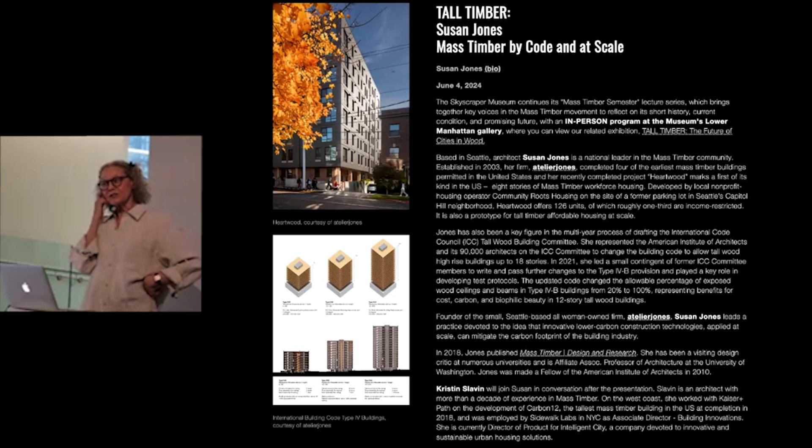So thanks for coming tonight, and thanks to the people online who will see this in the future. Tonight's event is the lecture by Susan Jones here in the front on tall timber, with a new title that she will post for you. But at the substance of this particular version of the larger series that we call the Mass Timber Semester, we're exploring a whole range of ideas that are embedded in the exhibition around you, here in the gallery: Tall Timber, The Future of Cities in Wood.

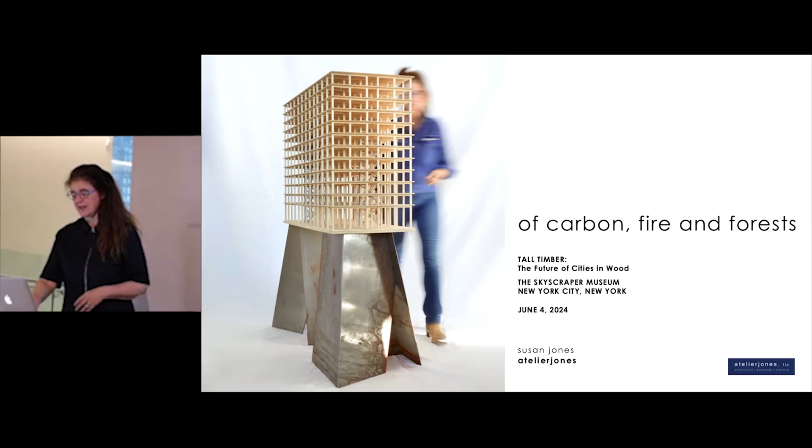This lecture is called Of Carbon, Fire and Forests. And I did change the name. I will cover all of the themes, but when I began to draw out the things that were perhaps less well known about mass timber, I kept coming back to these in my heart. So you're going to hear a little bit about that.

Just a quick thing on atelierjones. We are based in downtown Seattle, an all female-owned, female-led firm. We currently have offices in the Bullitt Foundation up on Capitol Hill, which is also known as one of the more sustainable buildings on the planet. At least back in 2013, it was the most sustainable building, and we've all globally learned from this building. I'm very honored to be associated with it today.

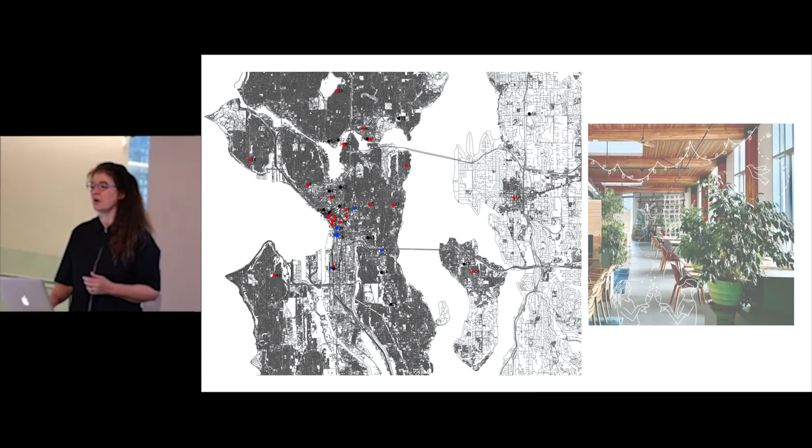But I also grew up in the Pacific Northwest, some third or fourth generation, depending on how you work it. This is a portion of my office at a retreat a couple of years ago, in a forest that I do own as part of my family. It's a little retreat center that I built there. And the forests are really important parts of our DNA and how we experience the world and think about them every day.

But a little bit about atelierjones, just very quickly. We have been known, as Carol mentioned, as national leaders in the mass timber space for over a decade, not quite 20 years, because I didn't even know about mass timber until I learned about it from my European friends, where I had worked for many years after finishing my degree at Harvard. The design work that we did in the first 3 or 4 years, which I'll touch on very briefly, established a relationship with the AIA nationally to go into the codes process, which I will talk about in more detail.

And that really became the training ground. In the beginning, it was astonishing to think that our little firm could have 4 buildings out of mass timber completed, and these were 4 more than any other architect in the United States in 2017. So that quickly has changed now, and I'm very proud of that. I'm very proud of the community having grown.

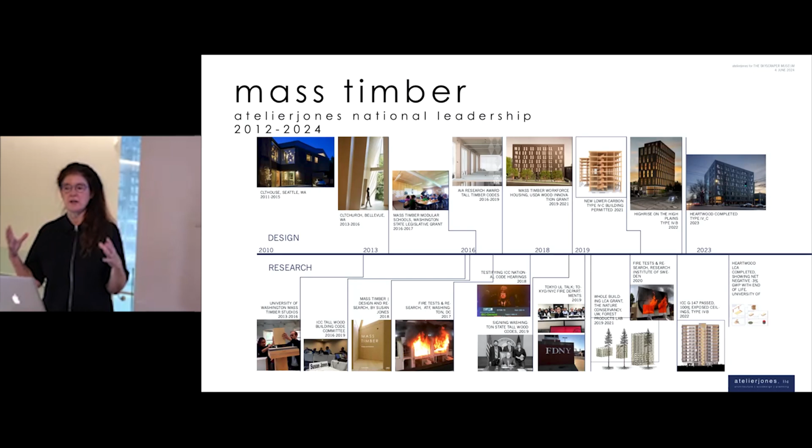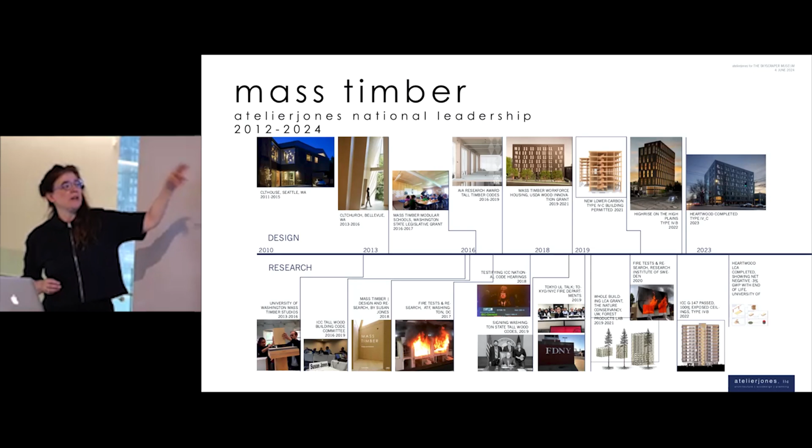Today we've completed some 12 or 13 buildings, with a couple more under construction and about 20 total in design. This timeline between design and research, going back and forth over more than 10 years, has been really important for us to track our initiatives, from fire test protocols to competition designs, to life cycle analysis work, to code development, and of course, building, which is closest to my heart.

We were lucky because nobody really knew that much about mass timber or cross-laminated timber when I was looking for a technology to build my house in 2012 and 13. The emergence of this material was an incredible start—I knew about it from Europe, but it had never really been tested much in the US. A little bit in Canada, but less here in the United States. So getting to know this material was an incredible part.

I'm going to outline about 8 themes that have been very important to my development and understanding of this material as an architect, as a designer. I'm not going to go into detail because this isn't a lecture about design, but they're very important motivators that have kept me in this world, kept me stimulated, and kept me excited about moving forward.

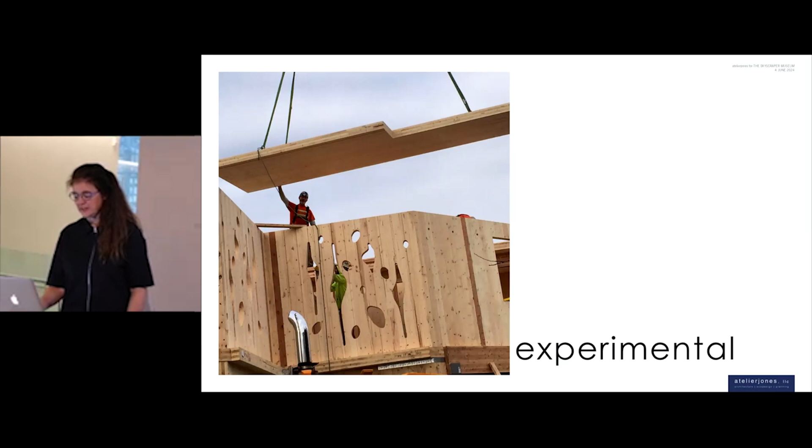The experimental aspect of this house was very important, as was the experimental aspect of the technology. It really was a house much in the way we talk about Alvar Aalto's house—an experimental house in my little family neighborhood in Madison Park.

Some of the themes kept emerging again and again. This references Semper, of course—the tectonic, the weird thing about all these sticks coming together, making these gigantic stereotomic walls, huge panels, and the extraordinary quality of that transformation—how this material we all know, the stud, the 2x4, the 2x6, the lam stock, created these massive walls, making incredible spatial experiences.

I kept going back again and again to this German opposition, Kernform and Kunstform—how do we make this constructive material into architecture? It's been one of the challenges of my career to constantly think about what the contractor needs, what the process needs, but also how to make art and architecture.

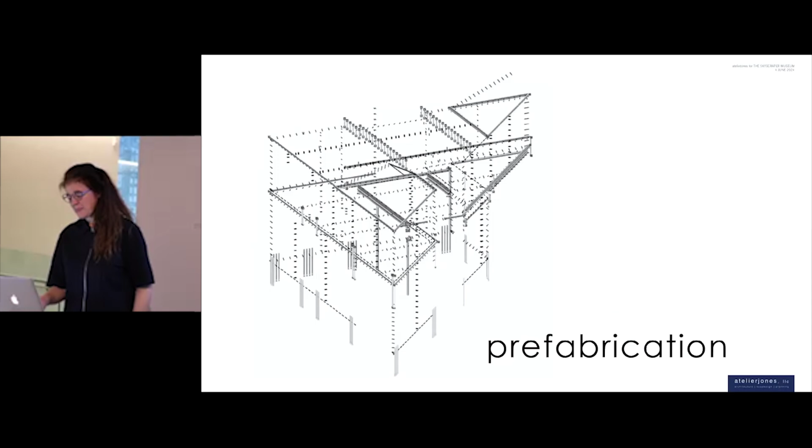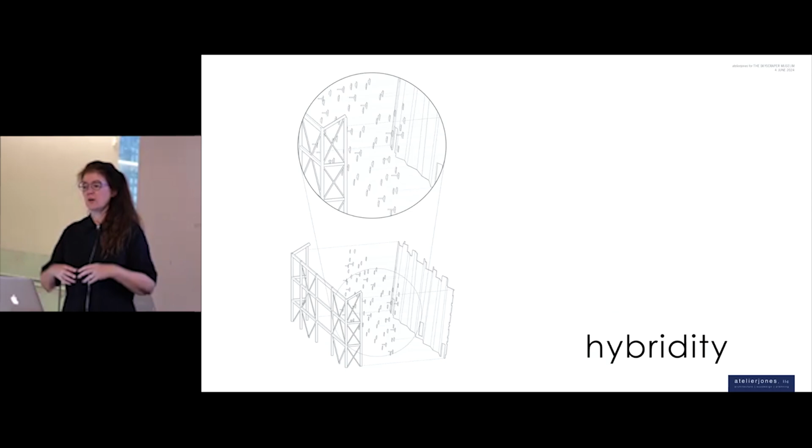The prefabrication was an extraordinary learning experience for me, diving deep into those constructive logics to understand how we can make this process work with the contractor, work with the process, a vertically integrated team to create these often hybrid structures—which so often get overlooked in our language when we talk about mass timber buildings, when of course there's concrete and steel embedded in them.

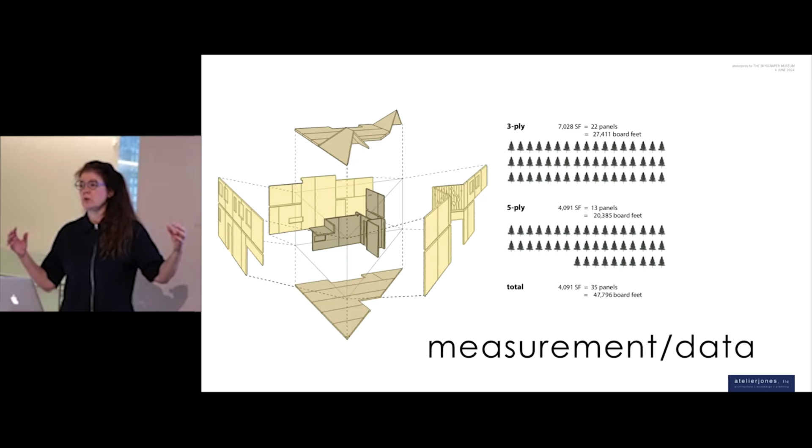How we can measure the trees, the cubic meters of wood in these buildings, how we can measure the carbon, and even the amount of trees and land it takes to grow and nurture them—that was an astonishing thing that we can measure. We can't measure concrete, we can't measure steel. Where does it all come from? We can measure weights and volumes, but we can't know where those buildings come from.

This is not just a model for Cascadia—it's a model for the Northeast too, where you have the opportunity to work with your northern climes in Maine, Vermont, New Hampshire, and upstate New York, building that same regionality across the 5 hours from New York City to Bangor, Maine.

So just a little bit—I'm going to touch on these 2 or 3 design process projects to begin. This is our CLT house. It's been well talked about, well publicized.

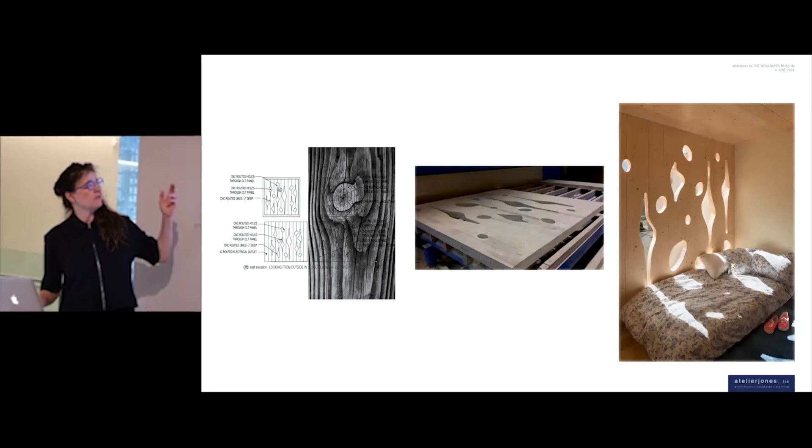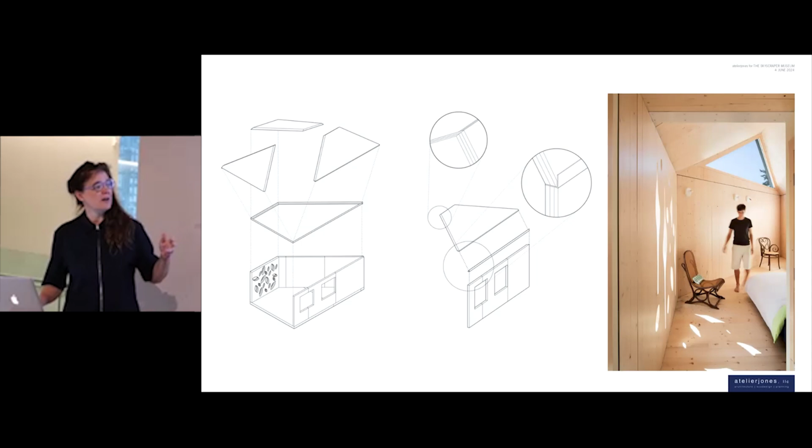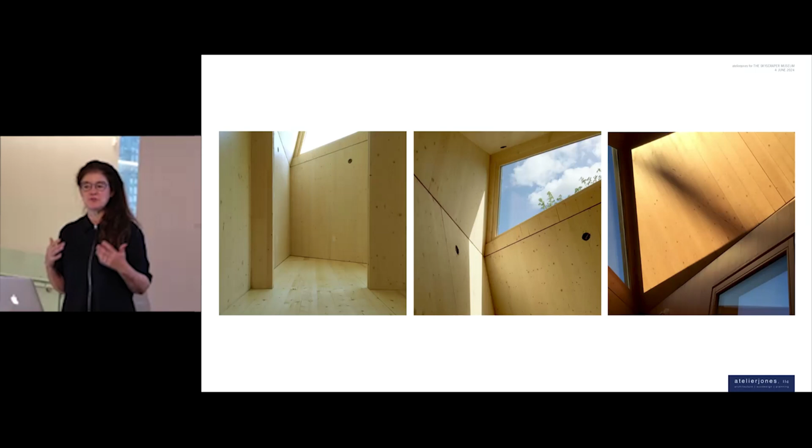I don't really need to go into detail, but I thought I'd give you an overview of the value and intensity of the prefabrication process, the beauty of it, the hybridity of the way steel is used versus the planes of CLT, the kinds of spaces that developed off this very awkward, very difficult triangular lot, a pure isosceles triangle, and how they struck this chord of biophilia, to use a fancy word, but it was just really being in love with the experience of wood, waking up in the morning and padding barefoot to the bathroom.

The CLT church came shortly after that. We were actually designing it while the CLT house was under construction. It's really just a wall in the backdrop of a sanctuary, part of a 50,000 square foot renovation of an existing office building into a space of gathering, meant to create awe.

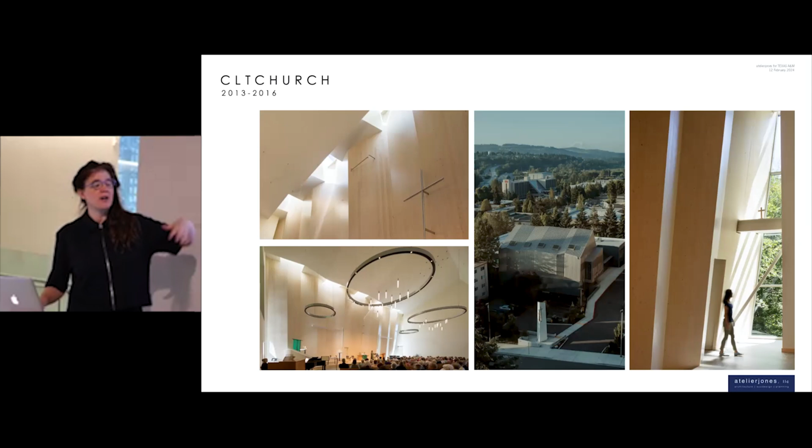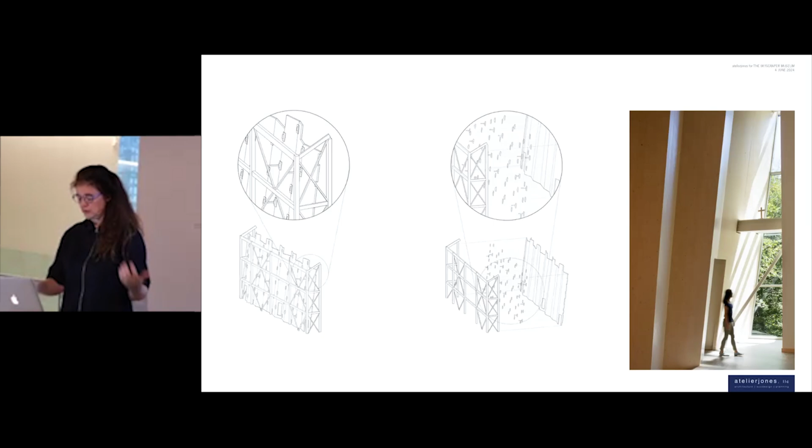The experimentation that went on with this building, using 17 forty-foot high panels that cascaded and undulated softly across the back wall, was an extraordinary journey — from a paper model to Revit models to Rhino models to beautiful wood models we made by hand and had tested in a daylighting lab at the University of Washington. Again, the theme of hybridity came up, because steel and wood were working together, and we had to figure out how to bring those two together to make the kind of beauty mass timber projects could live with.

At this point I had finished the church. I was very happy with these projects. We had two small schools under construction, and I got a call from AIA National. It was five days before the deadline to join the code committee in July. It was May of 2016.

I was on the street with my phone in hand, and they said, do you want to apply for this position to sit on the code committee? You don't know where, you don't know how long it will last, do you want to fill out this application? I knew about the code committee. I'd told myself I wasn't going to apply because it just seemed like a huge ball of wax — I had enough work on my hands.

I was excited about where the practice was going. All the mass timber work was exciting, new for the taking. And they wanted me to go sit in a conference room for who knows how long, for no money? No — expenses paid. Oh, okay, cool, that's great, thank you.

But there were about five people in Seattle I knew really well who were so excited about being on this committee. They'd been asking me for months, 'you're not going to apply, are you?' No, I am not going to apply, don't worry. I told the guy on the phone all of them know the code better than I do. I love the building code, don't get me wrong, I'm a professional architect, I have to love the code. But do I want to work and change that code? I could not imagine it.

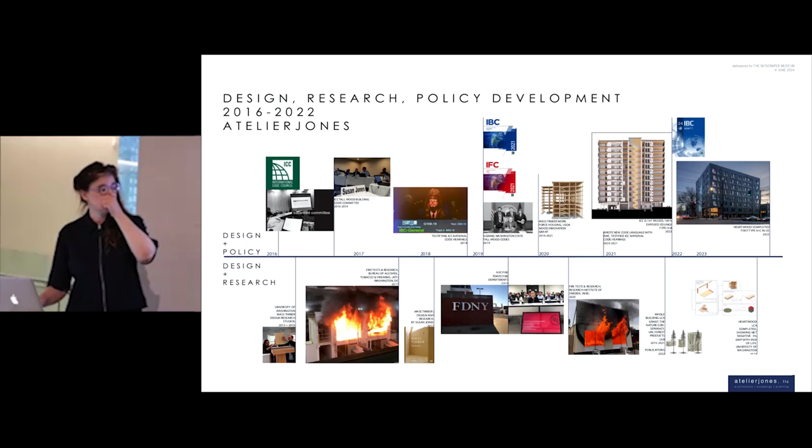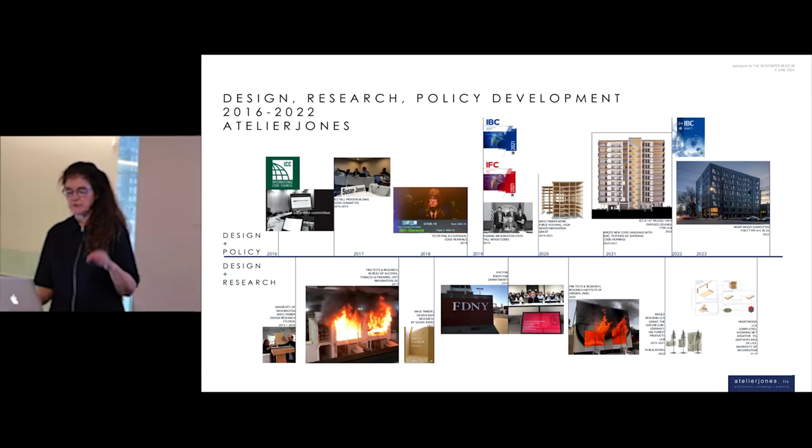Then building Heartwood, and all the while doing more research in the area of LCA work and carbon analysis. It became almost a parallel track in our practice, one that took extraordinary time and energy. We built a practice around it while continuing our design work as much as possible — but for about four or five years, my heart was really devoted to this.

This balanced committee, as I mentioned, was made up of superior people. There was Sam Francis — sort of a saint, that guy. And Steve DiGiovanni, the chair of the committee, who is the fire chief of Las Vegas.

Not the fire chief, he's the head of the fire ordinances for Las Vegas. Lots of high rises. He's had to go up in high rises and watch out for burning buildings. He has every incentive not to allow tall buildings to go ahead in wood. But he goes out on the line again and again and made this process happen.

It was an extraordinary thing, but we also had concrete at the table. We had steel at the table. And as I said, we had 6 fire guys, 7 if you include Steve. The extraordinary balanced makeup of that community was what allowed the codes to begin to flourish and work with each other after we did these fire tests.

Because up until this point, the fire community was just sort of shining us off. It felt like it anyway. And I mean that with respect to all of those colleagues, because they really came a long ways.

We had proposed as a community of code people on that committee to use data-driven research. We were not going to be political or scratch people's backs, or work on economic relationships or handshakes behind the scenes. We were going to create the toughest, baddest, most difficult fire tests that had ever been tested, as far as we knew on this globe, according to American fire standards, which is a very critical thing.

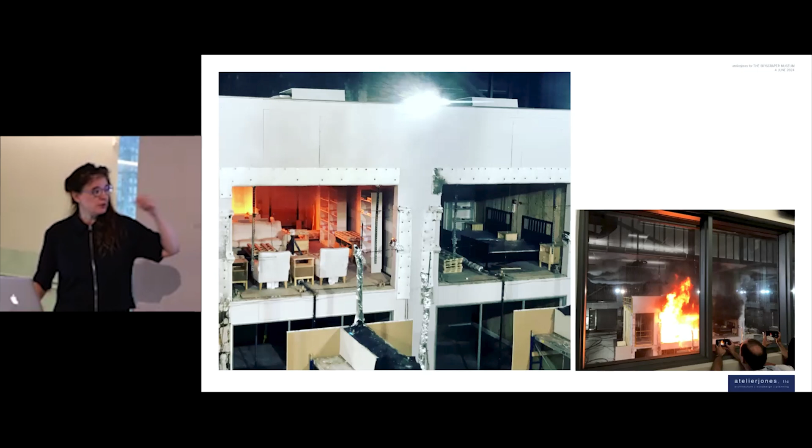This picture on the right is inside the viewing compartment, and we're looking down at the beginning of what's called flashover, again a technical term. It happens when the fire goes from a contained fire to an out-of-control fire, and you don't want to be in there.

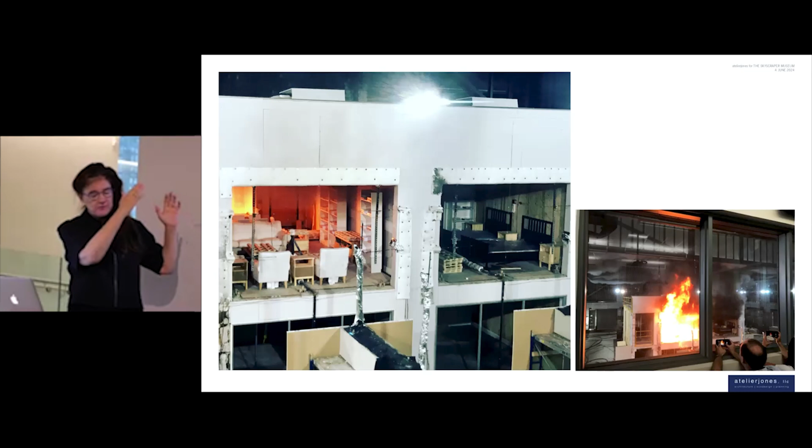You have about 2 minutes, everybody, to get out of your compartment. But the idea is that before flashover, yeah, I saw your face, the idea is that you have 2 minutes to get out, and that the fire stays in that compartment. So that's what we were testing, that the compartment wouldn't burn down.

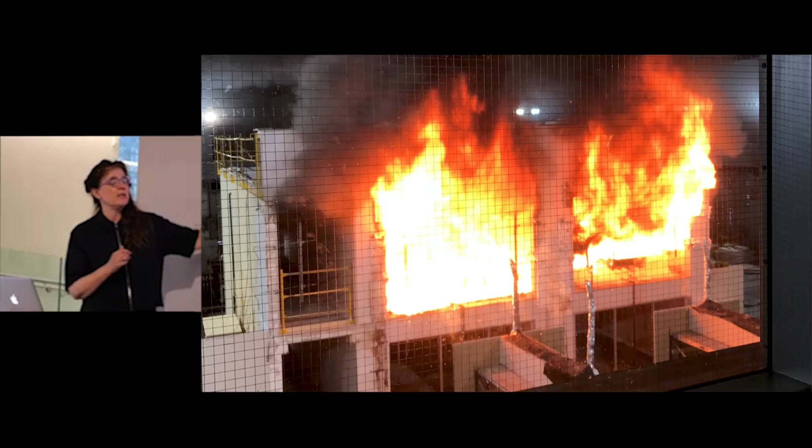We built these 5 times. We set 5 fires, and we tried to bring them down, and we could not burn them down. This is a picture that I took for test number 3. I'm out here in Baltimore in some suburban gigantic warehouse, with the national ATF. I'm looking through, this is wire glass, and we're about, it doesn't look like it, but we're about 100 feet away, and we can feel the heat on the inside of that quarter-inch glass.

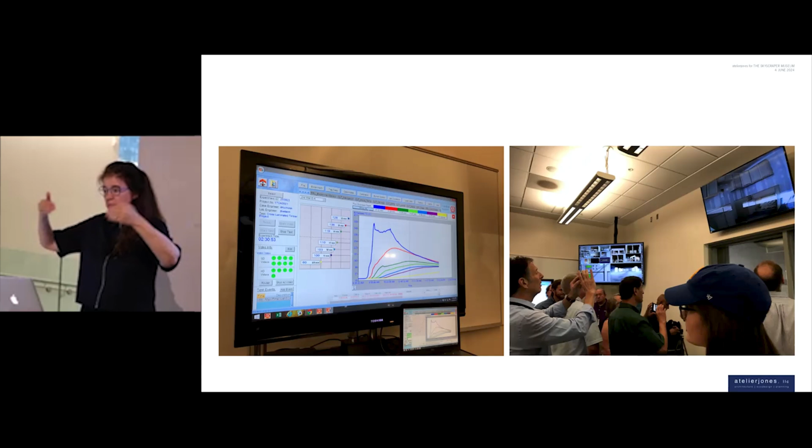These fire tests were extraordinary. They were designed by the best fire minds in the country. There were, I think, several thousand, I'm not positive, but several thousand data points, sensors inside the wood, deep inside the wood, to see if the temperature would be infiltrating into the wood, because that would, of course, add to the fuel load, and they wanted to make sure it was actually hot enough inside or not hot enough.

And they were surprised it wasn't hot after about 1.25 inches, maybe 1.5 inches. My daughter is there with her baseball hat on. We were there because after this point, this is flashover.

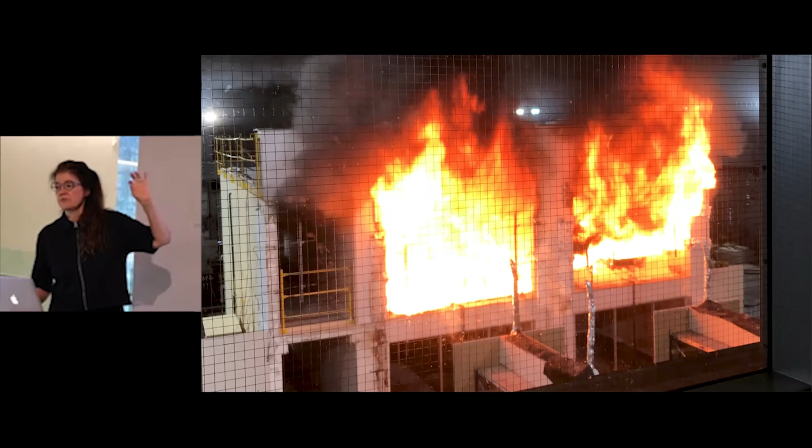We are waiting for 3 hours. Well, we're really waiting for 4 hours, but we only had to wait 3 hours to see if this fire would either go out or burn the structure down, or what happened. So this is like hour 2.5, and people are getting a little bored.

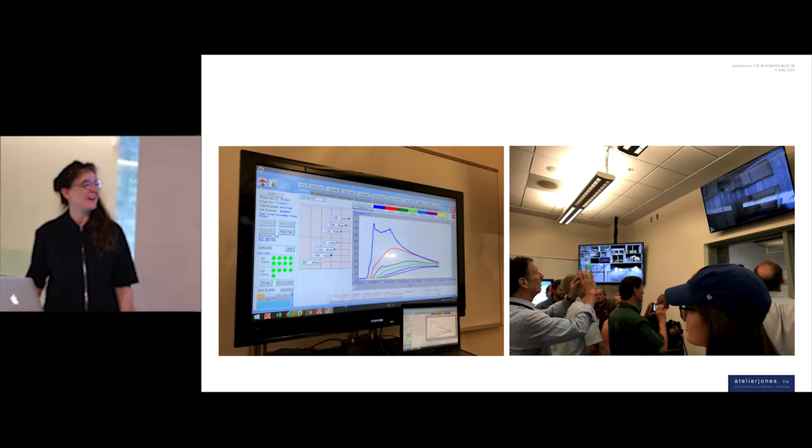My daughter is like, why am I here? Why did I come with you, Mom? What's going on here? And at the end of that 3 hours, you can see it's a total mess in there.

All those contents have burned down. Much of the gypsum wallboard has burned down, but the structure stands. So now imagine you're in a high rise and there's this catastrophic fire on unit B on the 17th floor. Now you're in unit C down here, everyone's gotten out of the building anyway, it's 3 hours.

There's been no sprinkler intervention and no fire department intervention. The fire department couldn't make it that day. The sprinklers all broke. We made the worst case possible scenario for this moment. And in fact, the structure, the building, the high rise was still standing. And that's a very important case.

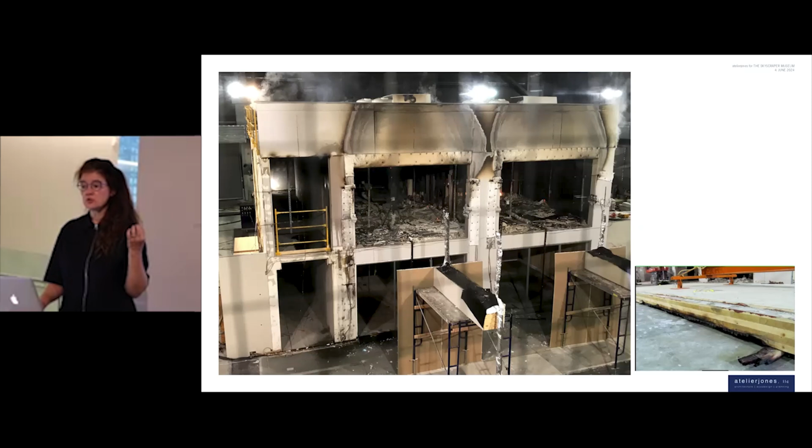We didn't mind that it looked like this because people had gotten out. We just wanted to make sure that the structure stayed intact. And that's the main takeaway, that all of those fire folks on the committee were in awe and somewhat shocked by it. They were truly surprised that this was the outcome.

You can see a little technical piece over there of the side of the CLT. That's what the walls, ceilings, and floors are made out of, the 5-ply. There's only this much damage of it, and that structural layer, those 3 layers of the structure, are still standing.

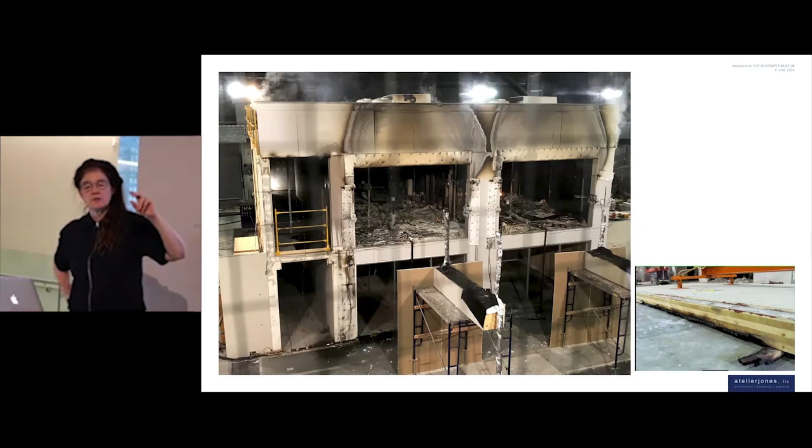Then I had the, I guess, misfortune, or it's something. I was persuaded to go do some tests in Sweden, which I didn't get to attend because of COVID. But we did 5 more tests in Sweden in the fall of 2020 in an outdoor facility, because the heat intensity from the ATF tests had been so great that we couldn't actually trust ourselves.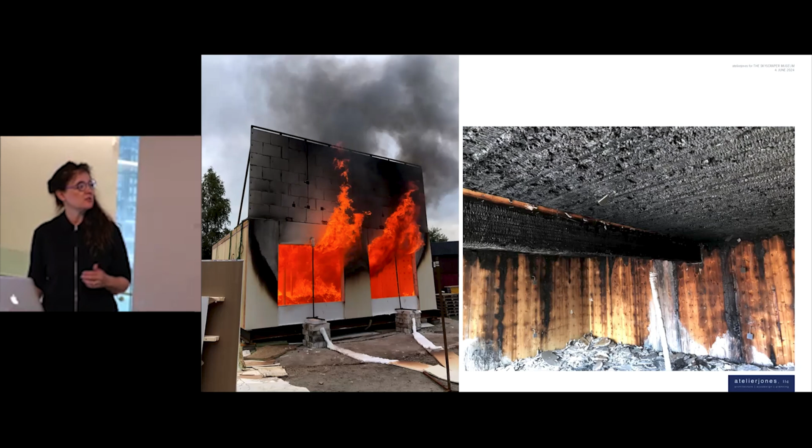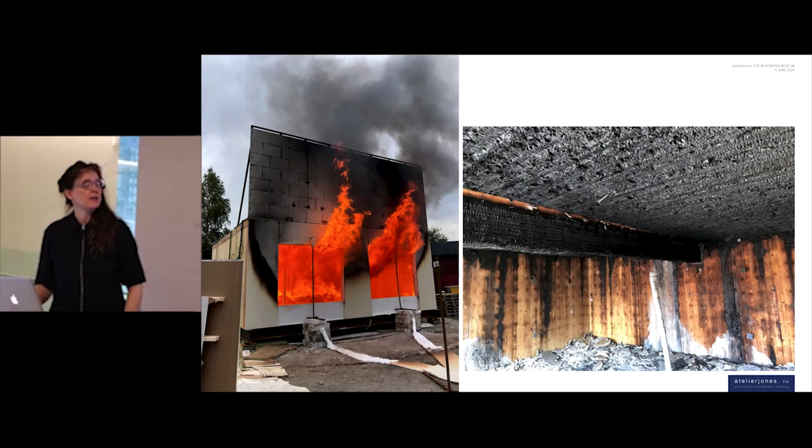We wanted to make sure there was enough heat going through there in a natural condition with ventilation. So we tried the same thing. And while this doesn't look like a fun place to be, you don't want to be in there in a fire, again, the structure stayed intact. This time we had the entire ceilings opened up, and the entire walls opened up. Those were the things that began to allow ourselves to really make the code with confidence.

Now, around 2019, in January, I had the privilege—I was terrified actually, to be honest—to go and speak to the fire department of New York City. It was after the codes had passed. I was there with my fire colleague, Sean DeCrane, who had, I think I can say this, voted against the process for the codes 15-3.

He was one of the 3 people, but he kind of in his heart knew that this was an okay technology. And he went out of his way. He was working for UL Listing at the time. I'm very grateful to Sean because he really acted as a provocateur in an intelligent and helpful way.

And he brought me to Randall's Island up north, on the side of Manhattan. And there I am, giving a presentation, sort of like this one, to about 100 firemen, I think they mostly were. And I think Kareem Khalifa was actually in the audience.

That was really fun. But there is Daniel Nigro—I don't know if any of you know him—but he was New York City's 33rd fire commissioner. He retired in 2022 after an illustrious 35-year career, and he's introducing this whole day of conferences on fire. You can maybe, if you look closely, see a picture that looks familiar. That's my house, the experimental photo I showed about 20 slides ago.

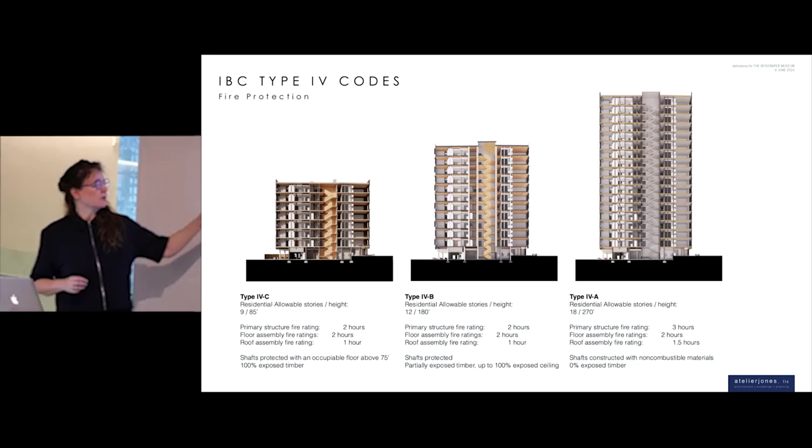So today, this is the outcome of the transition from smaller scale projects, which were known in the US up until about 2018 and codified until 2018, to the codes that allowed 8 to 9 stories, 12 stories, and 18 stories that are codified as of right today in the United States for jurisdiction, for adoption. These are also, of course, the codes that New York City codes are based on. They are slightly different than the type 4 codes - closer to the type 4C, kind of a melange of type 4C and type HT - but they use many of the fire protection initiatives that we've used here in type 4C, and they're very similar once you get beyond a couple of small regional differences.

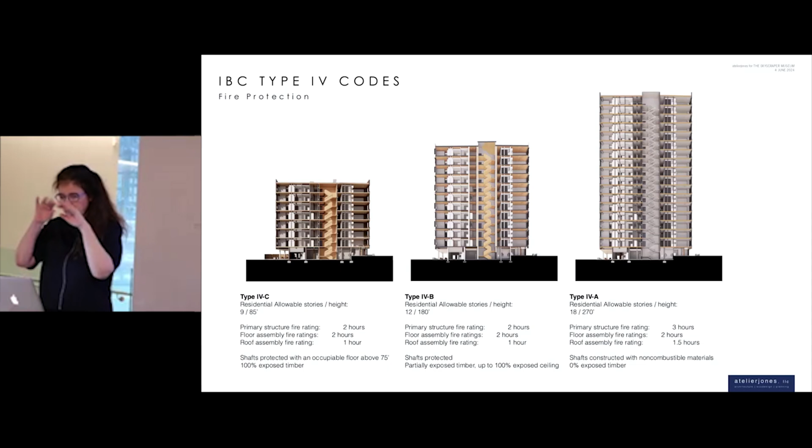So the wonderful thing about this story is that I get to go back to being a real architect again and designing buildings again. And here we are in Seattle again, working on a workforce housing building, thanks to a grant from the U.S. Forest Service. It was a kind of catalyst to our clients, for this community to take the risk that they felt was necessary to build a type 4C. So this is one of the first type 4C buildings in the US. It's certainly not the tallest mass timber building - there's a number of examples.

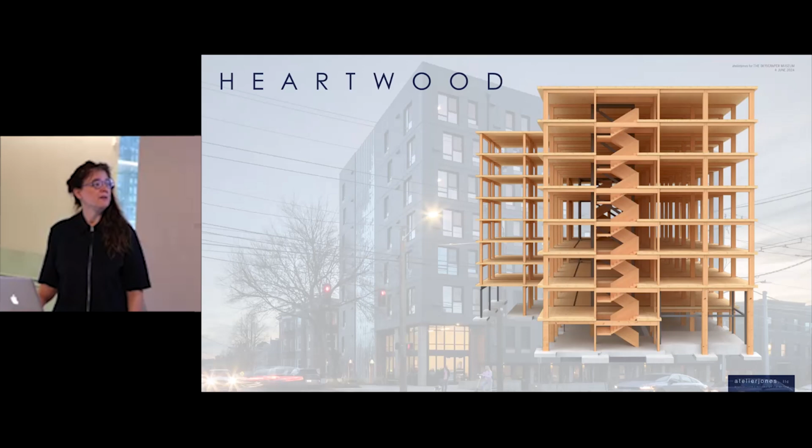Ascent, for instance, at 25 stories in the US, is much taller. But it was an extraordinary process that atelierjones led the design of. It's on a parking lot right next to a small brick building that the existing owner built and managed - it was a 1908 building. And this was also deeply affordable housing, this 4-story building in the back here.

And we had the great fortune to be able to build on a parking lot in the heart of Seattle. Heartwood, on the right, this is the view from that same perspective, is an 8-story, 126-unit building, mostly studios and 13 one-beds. The project serves incomes about 80% of area median income, which is quite high in Seattle, as you may expect from the growing influx of tech workers into Seattle.

So 113 studios, 67,000 square feet, an 8-story building. It's a very simple building, but we were able to invest a fair amount of the lower ground plane into the pedestrian experience and add amenities as inside and outside corridors, sort of an inside-outside street, which these diagrams begin to talk about.

A very dense area for Seattle, with 4 or 5-story buildings, 6-story, 7-story buildings. This is the tallest building in the area, but I don't expect it to be for long, certainly not for the next generation. The figure ground talks about the parking lot and the relationship of the new building to the old.

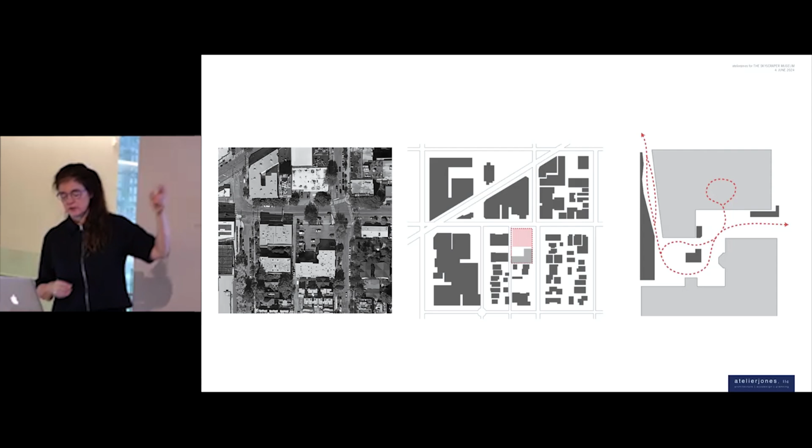And then these 2 floor plans, the existing floor plan of the 1908 building, the Helen V, and Heartwood, and the way the indoor-outdoor street begins to work and connect those spaces of the lobby with the lobby of the outside community and the shared courtyard that was shared by both populations.

I'll just go over some of these plans, and it's been published. Joann Gonchar just put a nice article out in Architectural Record last month, so a lot of this has been explained in more full detail. But to see this courtyard really come to life with people today has been a really beautiful thing as an architect, to see your project really take life.

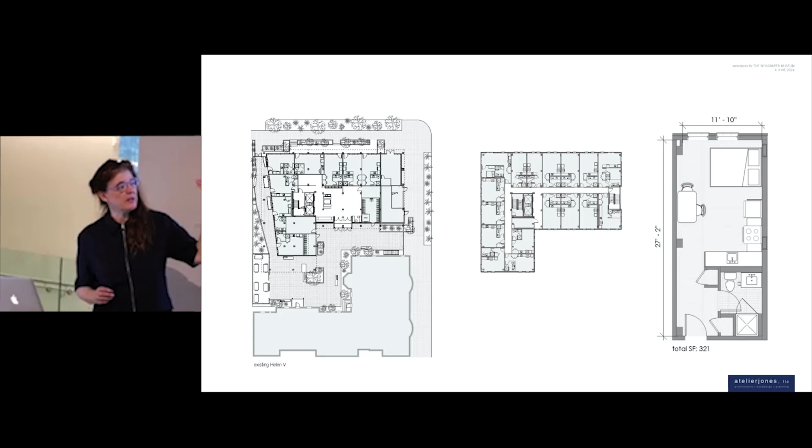The units are quite small. This is the smallest unit, 321 square feet. The average square footage is 400. This is the studio, of course, and we've exposed the timber. You can just see a little bit of the columns on the left side of that small floor plan. It's harder to see in this image, but there are columns embedded into the wall on the right side of that.

We were very judicious about where and when we would expose the timber based on MEP needs and ventilation needs within these small units, and how to reduce the amount of soffits in these projects as much as possible, to reduce those concealed spaces that are expensive to build, whether you're in New York City or in Seattle.

Some early renderings of the interiors, with some final photos on the right, and just a little bit of elucidation about the types of grids and the types of units.

We did not have a standard grid. People always ask, what's your standard ideal grid? We did not, because we were designing to the site, designing to the pro forma of the project, and we needed to get this project built and have as many units as possible. So the good news is we used every grid from 12'1" to 18'8", and we all know how much they work and how deep the beams all need to be, and change a little bit. We kept them similar in the units and then changed them where needed.

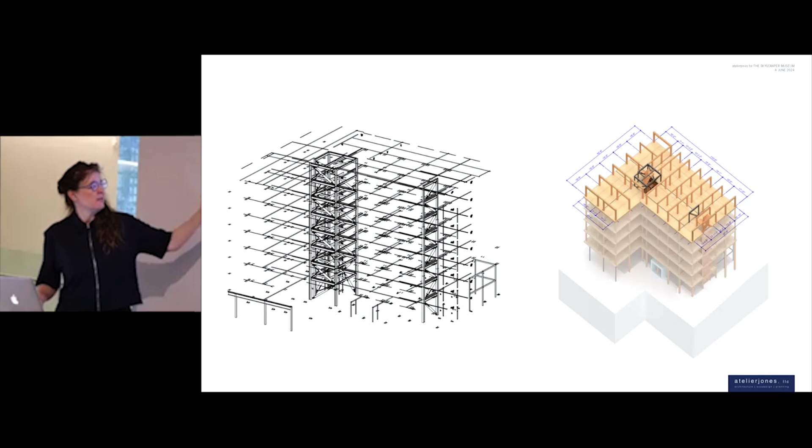I love this slide because it's a really beautiful axon about the hybridity. This is all the steel in the project, and how that translated into these different grids. Because of course we're in a seismic region, one of the other innovations was this was one of the first tall seismic buildings in the United States.

This is a couple things we're really proud of, and I have to give a lot of thanks to my partners on this: DCI Structural Engineers out of Portland, and Timber Lab, who's now here in New York City but was based at that time in Portland, and Swinerton Construction, who was the general contractor on this project.

But this all-wood joint is an extraordinary homage, looking at old ancient Japanese joinery and how we combine those in very large prefabricated massive ways to create these all-wood joints, which have intumescent tape in them for fire protection, which was absolutely critical. We needed to negotiate with the city of Seattle to do that, but it also creates this very flexible element for future projects and happens to save $5 a square foot in steel and lower its carbon footprint.

The image on my left here, with the green floor plates — the notion there is that this building is also future-proof.

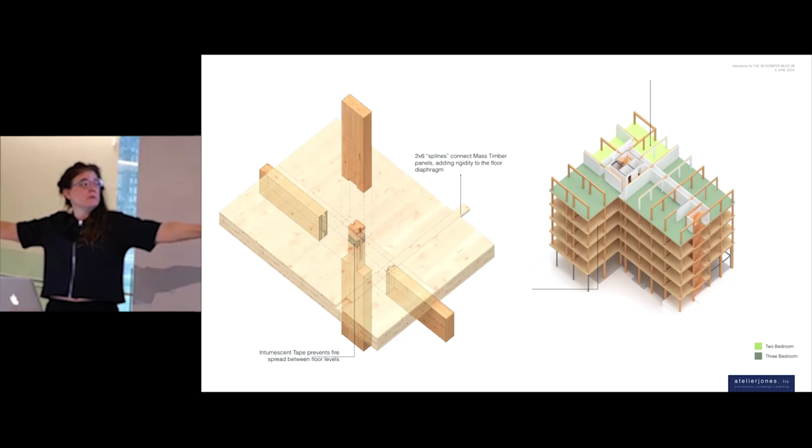What I'm showing there is the idea that you can take these demising walls down between the units, which are all just light gauge metal, in the future. You can take out some kitchens, redo the exterior of the building in 100 years when it has maybe reached a lower lifespan and the superstructure remains. You can put those units back as 3-bedroom, 2-bedroom, 4-bedroom units, offices, whatever one might need in 150 years. This building can be built almost entirely again and saved for another 150 years.

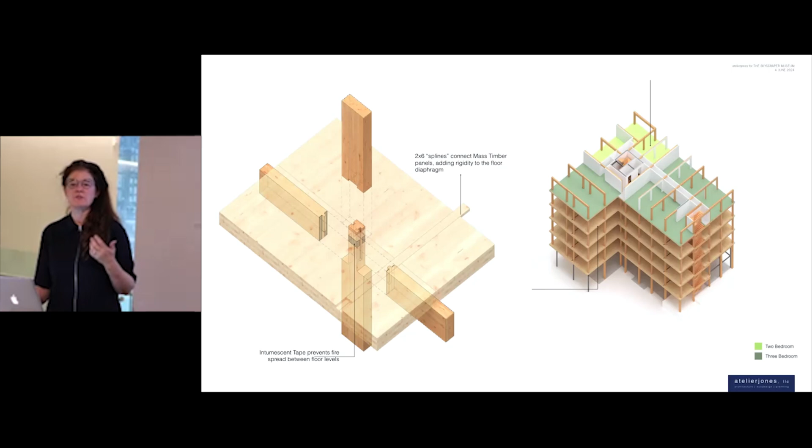We project that this is going to be a 200-year, maybe 300-year building, and there's a tremendous amount of flexibility, which is incredibly important over time as these kitchens wear, as the exterior wears, and as taste changes. All of this was possible through a massive Revit model, a BIM model, that we helped lead with Timber Lab and DCI on our servers. It really laid the groundwork for replicating this process in the future.

I'm going to talk just a little bit now about carbon. Not only was the building an extraordinary performer in terms of embodied carbon, we did do a number of operational carbon things. We were meeting very stringent energy codes from the state of Washington. I won't go into detail here, but rest assured we did meet some very high standards of operational carbon that was necessary.

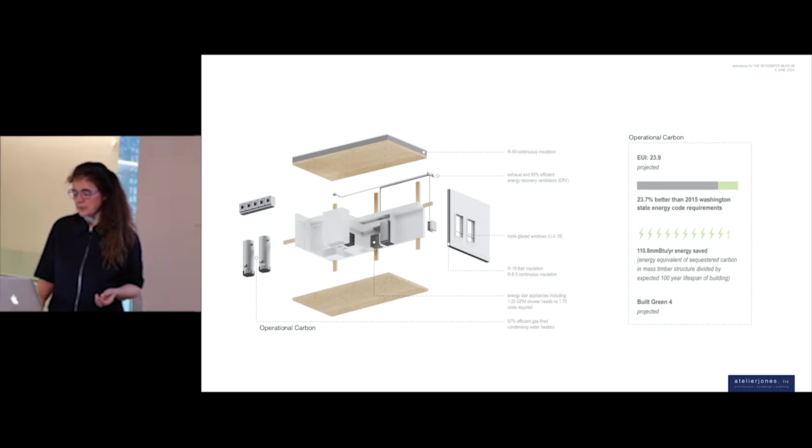But the innovation of this building was that we were able to quantify in a very clear and simple way the embodied carbon and the life cycle analysis, the LCA performance of this building. We had an additional grant of about $30,000 from the U.S. Forest Service to work in a partnership with the University of Washington to do this.

And this is where the notion of scale really begins to make a difference. I'm going to walk over here. I think that's okay. Because...

These are the two comparisons of the amount of carbon it takes to build these two buildings. This is a concrete equivalent at 8 stories. We modeled it exclusively in concrete as a commercially viable building, an 8-story concrete residential structure in a seismic zone, including the foundations. We modeled the superstructure in concrete, and then we had the model for Heartwood and modeled that superstructure. Comparing these two numbers, 100% as a bar for concrete, Heartwood took 62% of that carbon, meaning it was 38% less carbon footprint to build.

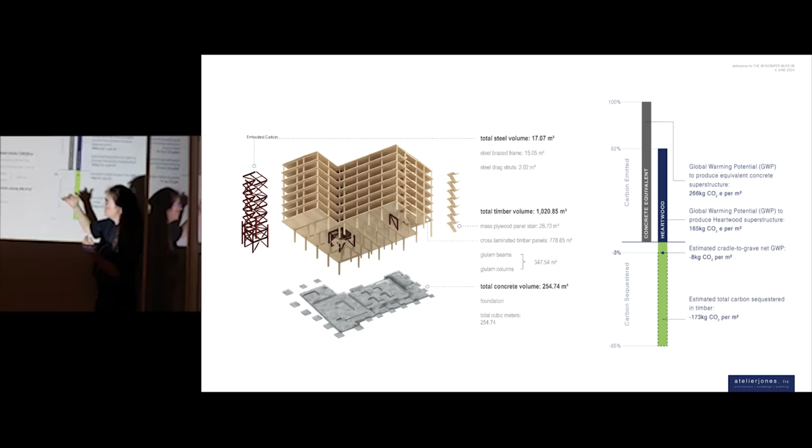But that doesn't include all of the carbon that's sequestered or stored in the superstructure of Heartwood, which includes the quantifications of the superstructure itself, the stairs—both exit stairs were wood—the columns and beams, as well as CLT slabs, and then of course the concrete slab-on-grade foundation and the steel hybrid piece.

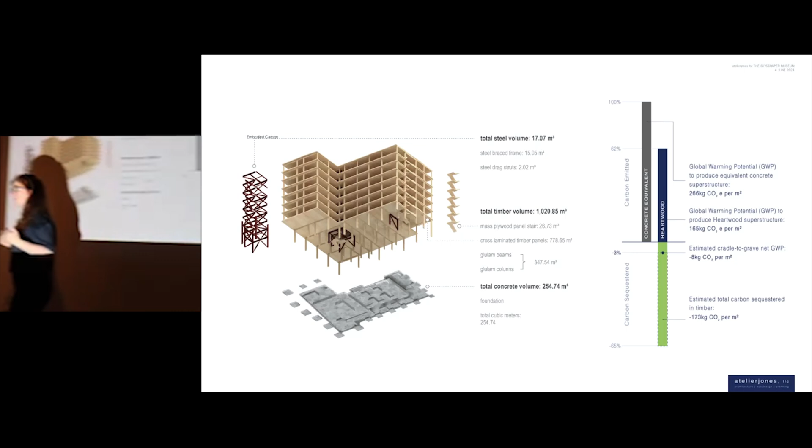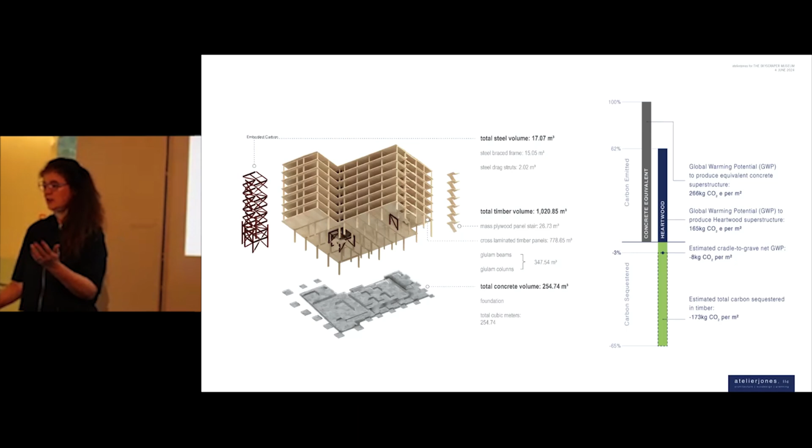So when you take this amount of carbon and you subtract it, you get a number that's minus 3%. I've always wondered, can we really talk about mass timber being a net negative superstructure at scale? With this study done by some of the best LCA scientists in the United States at the University of Washington, I can say confidently that this building is net negative. And I'm really pleased about that.

The reason I can say that also is because of the innovation of this end-of-life diagram, which we just presented about 2 months ago at the Mass Timber Conference. It's really groundbreaking work done primarily by an amazing graduate student in this lab run by Indroneil Ganguly at the University of Washington School of Environmental and Forest Sciences.

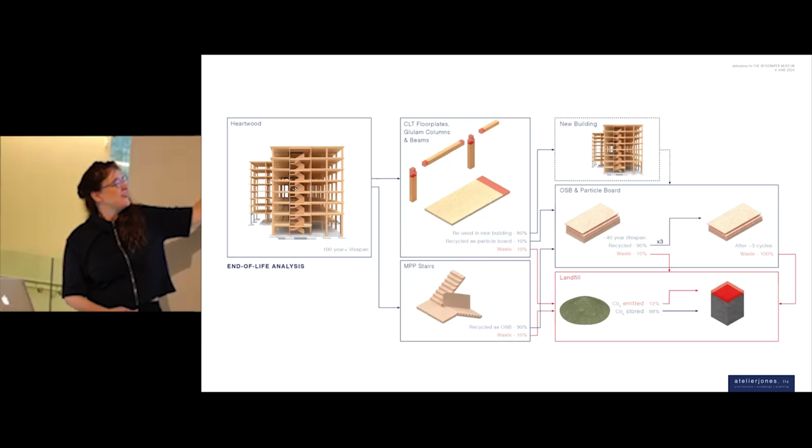That begins to say, okay, well Susan, you got 200 years, you just said a couple minutes ago for this building to last. What if it actually lasts only 100 years? Okay, we'll be conservative and say 100 years. But the idea is that all of these pieces would be taken apart and put into these different panels.

And yeah, you got to cut off 10%, so that's the red. You take those pieces, but you make another Heartwood or some version of it for another 100 years. Meanwhile, you take the red stuff, and that goes probably into some plywood. Then after 100 years that building comes down—those are again conservative numbers—and all of that wood from the 200-year-old second Heartwood goes into plywood, etc.

Industry says you can recycle plywood, grind it up, make it into OSB, for every 40 years, 3 times. But what happens after that? It goes into landfill, and that's that green circle down there. In that whole process, you're losing about 10% to the air. But in landfill, and these are from EPA statistics, about that is capped off. What does the number say?

It's 88% and 12% load.

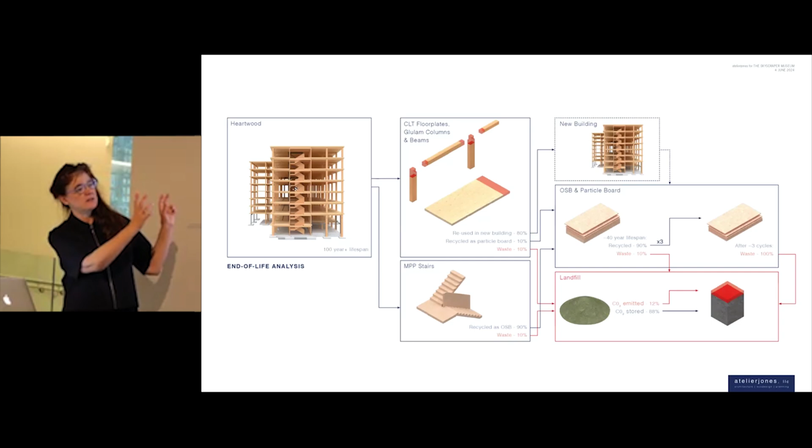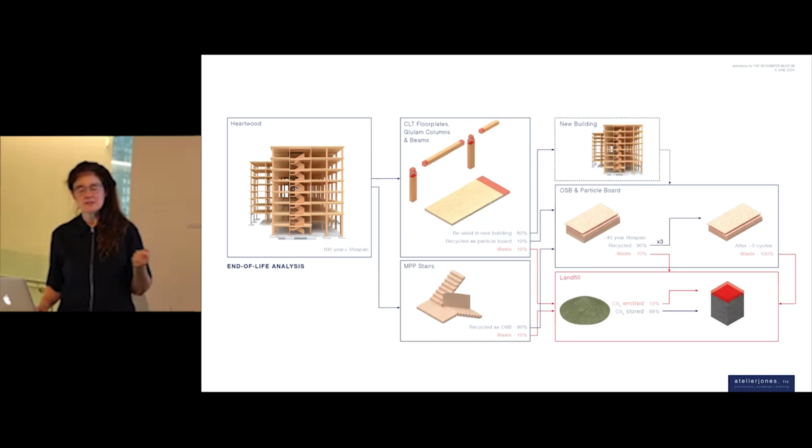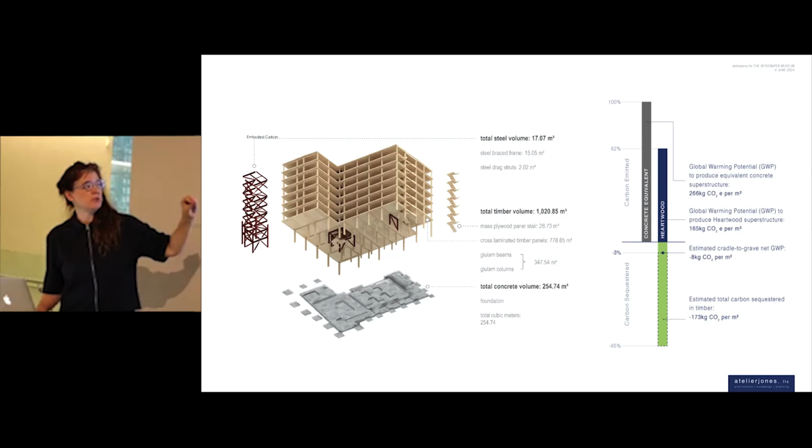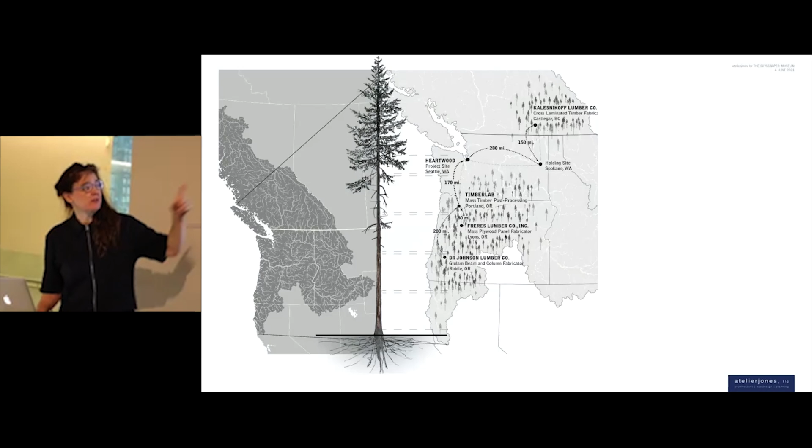One of the things talked about a lot is what happens after the building comes down - what is the end of life? We were able to posit a very strong, legible, and clearly understood case, thanks to Christina Jarvin, who did this for her PhD dissertation thesis. We're really thrilled about this result, and that's what led us to confidently say that end of life is included here as a net negative building. Multiply that across buildings after buildings, 38% lower carbon just to build, plus the stored carbon - this really begins to make an impact at scale, as long as the wood is forested and harvested sustainably, which Heartwood was.

I'm just going to show you some fun pictures of it under construction. This picture will never be seen again because it's all wrapped in 2 hours worth of gypsum wallboard now. But it was extraordinary seeing the hybrid stairs, the MPP stairs we made into sculptures on the lower floor, just seeing all that wood under construction. These are not concrete columns - they are actually just wood columns wrapped in Tyvek. Mount Rainier's out from somewhere.

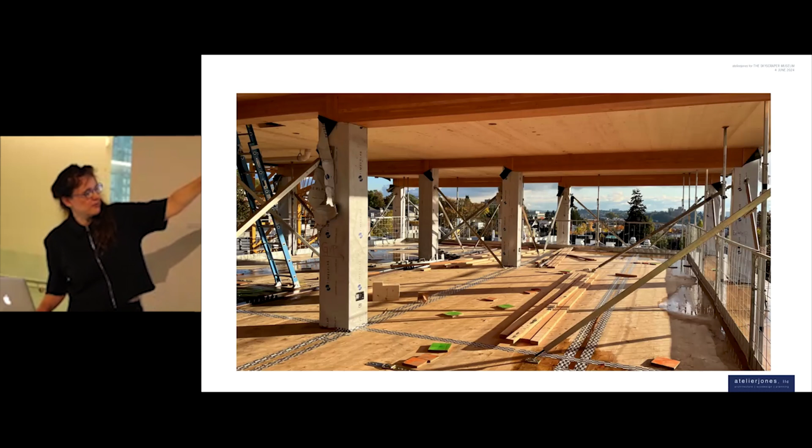And now we're ready to talk about replication. Having done this once before and built this as a team - this is a highly collaborative team that took 20 to 40 really serious people for about 4 years - this team is ready to do this again.

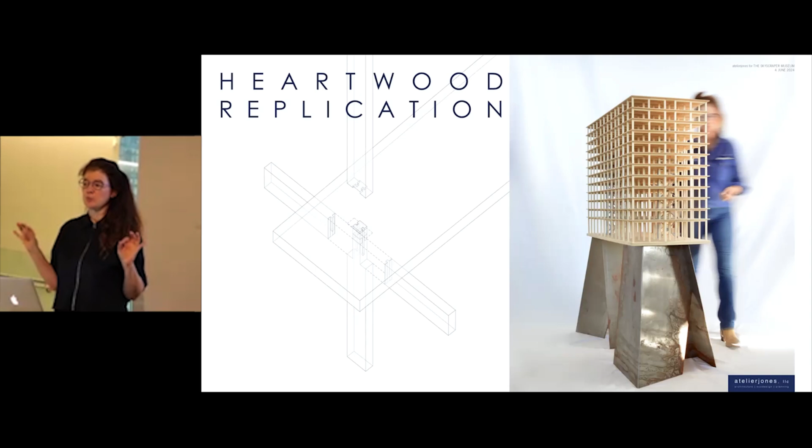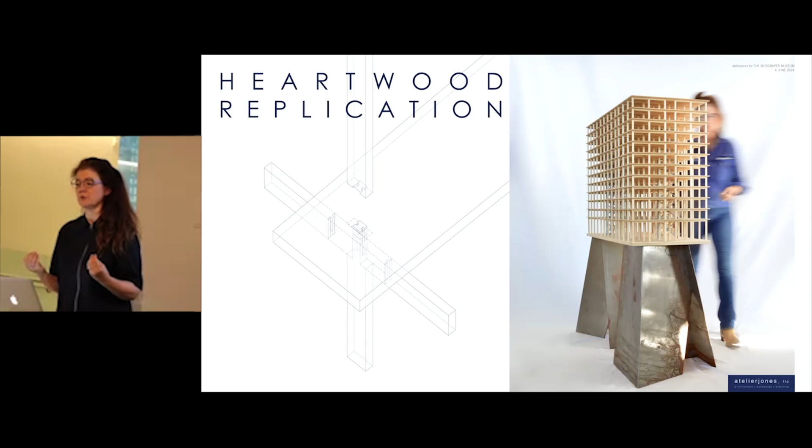A lot of the hurdles weren't about the wood, but about the fireproofing details and some complicated stuff that happened during construction, which frankly, those fire tests, we had to do them. But we also had to detail and work with the contractors to get those to work. We've overcome a lot of those hurdles. We can anticipate them, we know what they are, and this team is ready to move into the next level of replication.

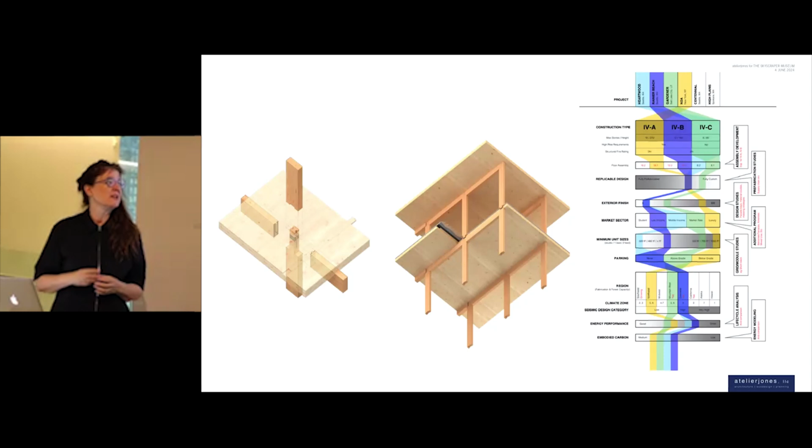We know we have a flexible, simple to understand system that structurally can be accommodated in almost any jurisdiction in the country, any regional area, given some 5-hour, 15-hour relationship to a mass timber manufacturer - whether it's for luxury housing at one end or workforce housing, affordable housing, or student housing at the other end. This is an amazing opportunity to really begin to think about the next generation of Heartwoods.

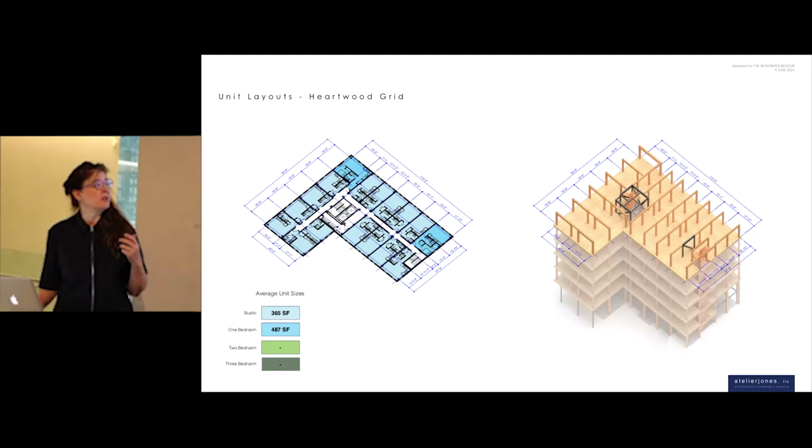So we were able to do a little study on this, and we're working on a publication on how this building can be replicated, looking at differences in the structural grids. What are the key salient pieces of this that can be replicated, and what should or can be changed without messing with the system? Again, we found it to be flexible and usable in so many different ways.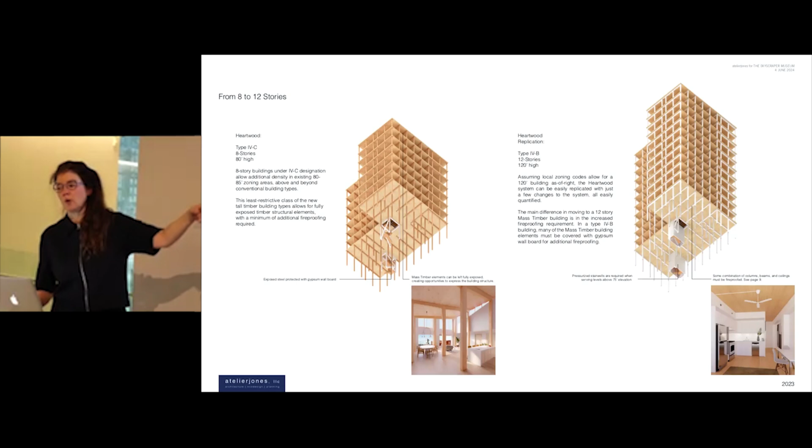I'll just go through these different grids. Again, what is the perfect grid? What does it feel like when you go from 8 to 12 stories? What are the additional adds? Yes, there's some gypsum wallboard on the walls and columns, but those ceilings are just as open as they ever were.

And we're even looking at some projects at scale - what if we did 15 Heartwoods on a site? How exciting would that be? To begin to build 8 and 12 stories made out of the same exact system, using it again and again and again, times 15, for just a few acres of lawns.

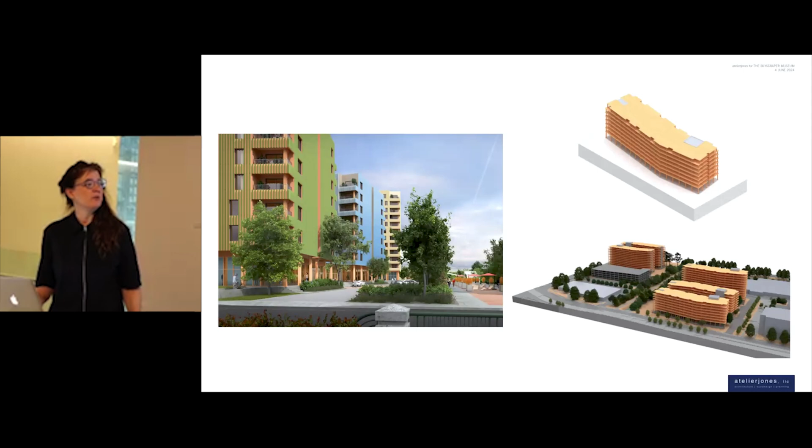And the beauty of those projects and how they can come alive through their mass timber superstructure. So fun with wood and fun with scale and fun with cities, and let's keep it going.

I'm going to talk about our New York City project really briefly because we're in very early stages, but I'm really honored to have Gisèle here from the EDC. It's just been a wonderful initiative that New York City EDC has taken forward on this. Lots of risks and lots of things to push forward, and we're so thrilled to be part of the inaugural class of the Mass Timber Studios. Gisèle, thank you again. We have this wonderful site.

It's absolutely glorious. It's vacant right now, as you can see. It's right next to our Carnegie Library up in Harlem, facing southward towards Manhattan, towards Marcus Garvey Park, looking down over the entire park of Marcus Garvey, with a little tiny icon back there, a beautiful shrine, because it used to be a convent. It was built in 1946. The site is now vacant.

But we're really thrilled to be part of this really extraordinary design for this site. The project had been designed by a former team. The owner had put that team on hold some years ago because they were pursuing a parking waiver, which looks like it's looking good. I'll just say that quietly, to have this parking waiver granted for this particular site up in the 125th area district.

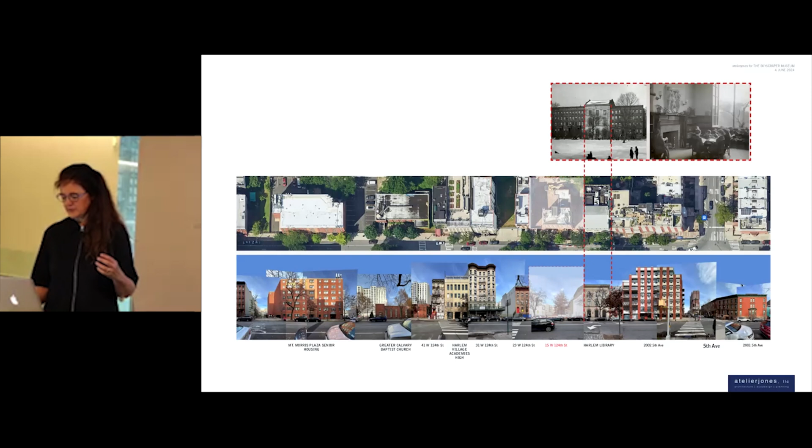And the project is now back thanks to the Mass Timber Studio, and we are looking at, as the new team on board, a local team that I'll mention here: Sage and Coombe Architect Record, DCI, Swinnerton Construction, which is based in New York City, and Timber Lab, also based in New York City.

Tanya Luthi, you mentioned earlier, Carol, spoke here at the Skyscraper Museum. She's really been a force in some of the New York City codes. This incredible vertically integrated team has been part of this really wonderful process through the EDC and the Softwood Lumber Board, jointly funded, to advance in a big way these two commitments: this major commitment for the Mass Timber Studio under the executive order for New York City to help decarbonize your buildings here in New York City. We're thrilled, as I mentioned before, to be a part of this.

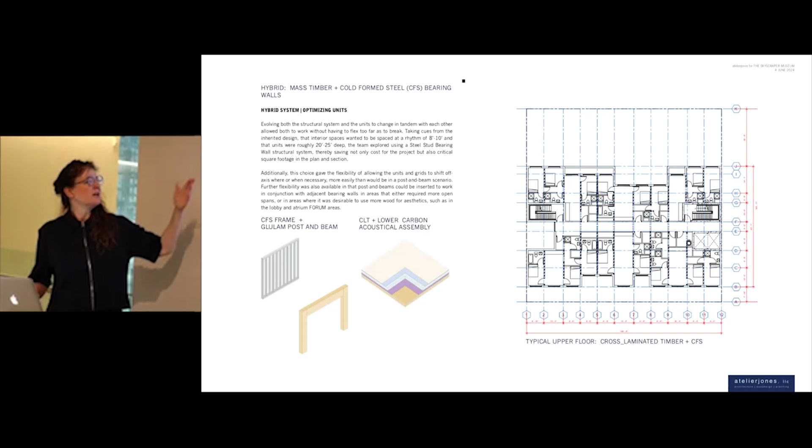I'm not going to go into much detail about this because the project had been in design development when we took it over. There's actually a fair amount of detail in all these drawings, and I'm not going to bore you all. We've been working very closely with things like structural grids and layouts that we've been working on the last 2 months for this project, working with different assemblies, post and beam, post and plank, just using a basic CFS system with a glulam post and beam below.

But one of the most exciting things is that we've been able to decarbonize the program as well as decarbonize the superstructure of the project, partially because of this parking waiver that we were granted or about to hopefully be granted. There's a series of unexcavated spaces - we took almost a floor and a half out of the basement, out of the sub cellar. We were very thrilled to be able to do that, to bring that foundation up, bring the costs down, bring the amount of carbon embodied in the lower cellar area down as well by a significant amount.

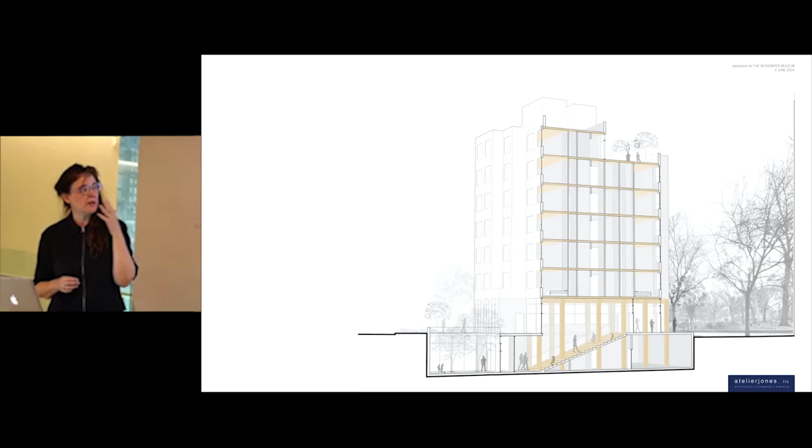We're creating a little piazzetta, which was part of the original design, but we sort of enlarged it and shaped it around the experience of these massive wood columns, which are coming down and holding this project. Here's a very early rendering of how that would be perceived off of 124th. You come down those stairs into a lower sunken courtyard, looking out to a garden in the back and a little shrine in the back with 33 units above on an 8-story building, including the roof deck and the cellar.

So we're really thrilled about this project, and we hope the pricing comes back. I'm going to just end here on a little soliloquy about forests, because these projects in mass timber really don't make sense without having sustainable forestry. It's been one of the joys of this whole process to me to get to know the forests and to get to know foresters and people who know about forestry.

I'm not a forester, and I never will be, but as much as I walked through them, enjoyed them, hiked through them, camped in them, I didn't really know about their structure and how they worked. And every forest is different. Your forests here in the New England area are very different from the Northwest, but they all have the same questions and provocations and needs for their health. It's been an extraordinary journey. This is Eleanor from our firm, and Adam, our structural engineer, Taylor Cabot's in the back there from the Timber Lab. We've invested a fair amount of time in understanding our forests and what they mean as organic ecological entities. We really care deeply about them.

One of the things that really brought it home for me was a forest that I actually own in my family. It's a family forest of about 140 acres on a small island outside of Seattle called Orcas Island. And while we all love to think about this beautiful, ancient, old growth, protected national forest park, a lot of our forests look like that in the middle. And that's my forest. I'm embarrassed to say that.

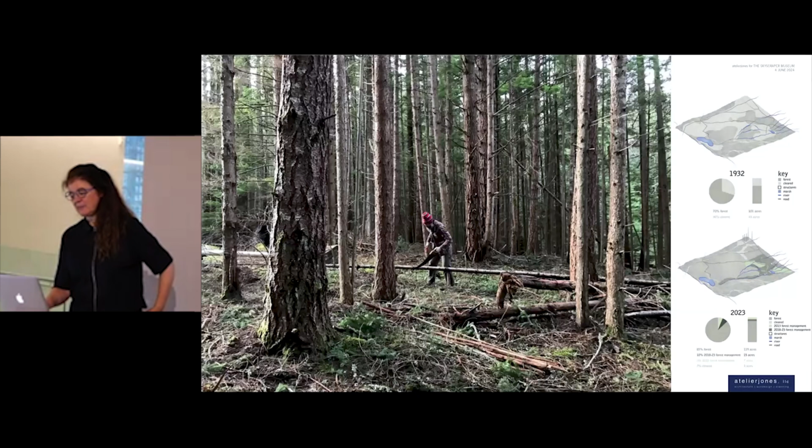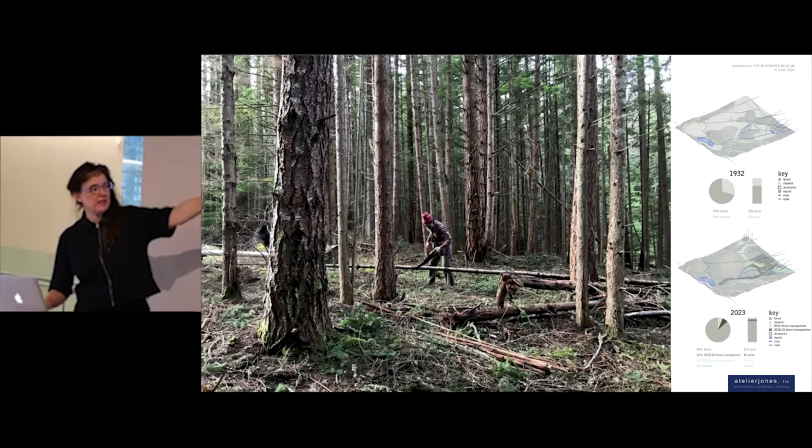So my husband and I, my family and I, friends of ours, have been managing this forest, and I'll go through these rather quickly. You can see that top image from 1932, how barren the land is. The land has actually come back with a lot of greenery in the last piece, and we've touched and treated about 10 acres of it.

We've created this kind of informal community of family and friends, including Kristen and Lucas, who've been up there a couple of times, and including a local logger, Rich Harvey, from a 4th generation logging family on the island, to really help do our best to manage these forests as a volunteer effort over time, and to bring back some of the forests' quality, the mosses of the ground plane, and the openness and access to them.

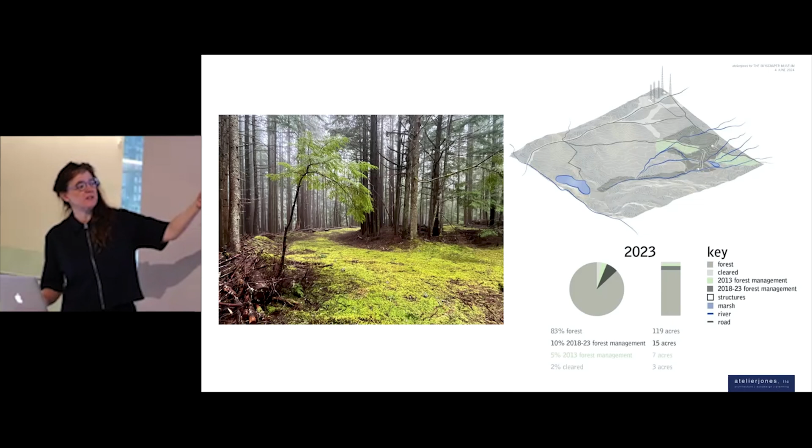This is just from 8 days ago when I was in the forest, and we've treated as a group about 15 acres of this forest over this last 5-year process. I think this was from last Monday, I was up there. It's first of all a great workout, but it's also an amazingly beautiful restorative place to be, literally throwing these little 3-inch hemlocks around on the site. It's been a really amazing thing.

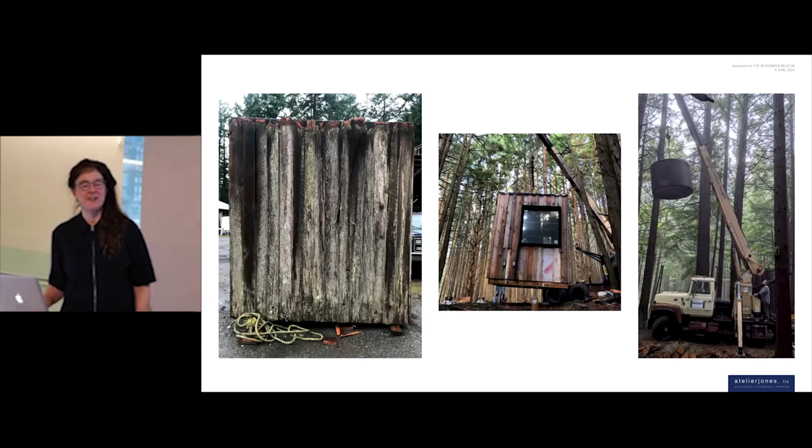So we built this little project up there as well, an 8x8 little restoration of this water tank shed. I'll just end on these simple images of the restoration - taking it down off the mountain, adding new wood to replace the rotted wood planks from the 1940s, bringing a local contractor in with a very old crane, swinging that modular piece into place. Now it just exists as a small accompaniment, a small sort of place of restoration and rest for those forest management crews, for that family and friends who help us manage these forests.

And we have treats there. Come full circle - it's a beautiful place, and I urge you all to get to know the forests.

Thank you so much. Thank you, Susan. That was a really wonderful, detailed overview of the amazing work that you've done, much of it unpaid, volunteer, for the betterment of all of us who are trying to do work in this field.

So I've got some questions for you. I'll also take some audience questions, so start thinking about what you guys want to know from Susan. But I guess to start, since this is from where we ended, how does your experience managing your own forest continue to influence the design of your actual buildings and projects?

Great question. I mean, you get to know a tree and you think of these big trees in the old growth way, but you get to know these little tiny trees in very small ways. And I think for me, it's mostly a sense of respect for the forests, of just how much it takes to grow a healthy tree and a biggish tree. We're not harvesting any big trees anymore, thank God.

We're just harvesting these little ones. We're harvesting 8 to 10 inches from the west coast, and at the Nordic land, we're harvesting actually 4 to 5 inches of the black spruce.

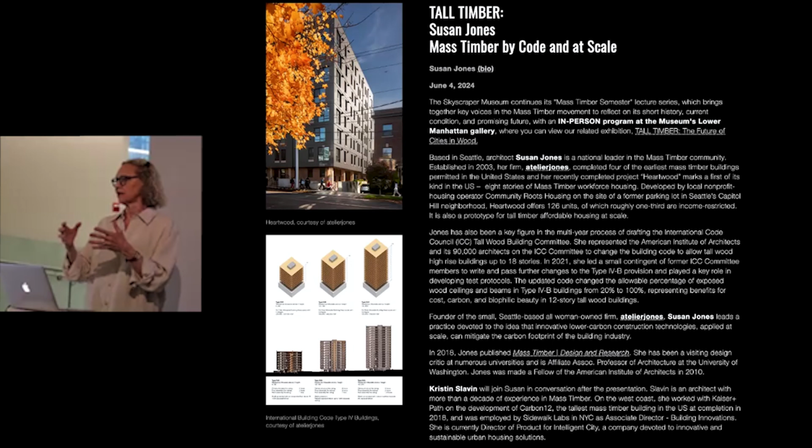She's going to talk about that as well as other projects, indeed one that she's engaged in in New York now, because she's here tonight from Seattle as one of the architects in the exhibition that are from Vancouver or Seattle or Portland, who constitute a regionalist approach, a kind of ethos of the forest and aesthetic of wood, which also has within its orbit a history of logging and of the industry of timber that makes that place, I think, truly an incubator of ideas that have informed in every way the thinking, the education, and then the work of the architects who are speaking in this series.

And I think we have a lot to learn from them. So I will just quickly go through these slides and let Susan come onto the screen.

You are sitting in the gallery, and the people who are listening online are not seeing you, but you are occupying the space that you see here that features buildings at different scales, at different heights, including tall timber towers, as Michael Green spoke about just two weeks ago, his interest in scaling up in terms of the number of units, but also in the heights of buildings, which is the next step to go as well.

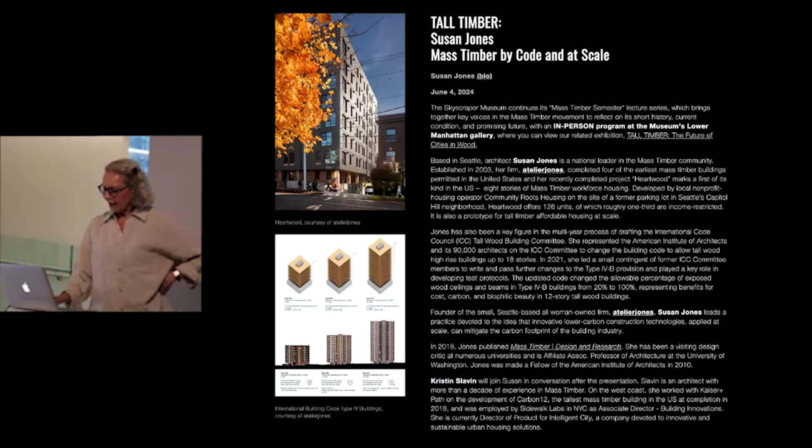I'm also focusing on one of the bays and the cases in the exhibition in order to remind myself that after Susan's presentation, we're going to have a conversation and a dialogue with her friend and colleague, Kristin Slavin, who also spent time in the Pacific Northwest, but is now back here in New York and has had experience at Kaiser+Path.

So in the slide that you're looking at, she worked on both of the buildings that are inside of that case. Ben Kaiser is an architect and developer who's worked on these projects, and Kristin worked on them as well.

She then spent some time with Sidewalk Labs in the New York office, and many of you know the project that did fail to launch on the Toronto waterfront for a variety of reasons, but that promised to scale up into a demonstrable project of both production and then the completion of whole neighborhoods made of timber multi-story buildings.

She is now currently at a company called Intelligent City, which works on sustainable housing and prefabrication in very interesting ways. And so in that conversation, she will tell you better than I can here how the future of timber can be envisioned with all of these innovative projects, but especially with sustainable values.

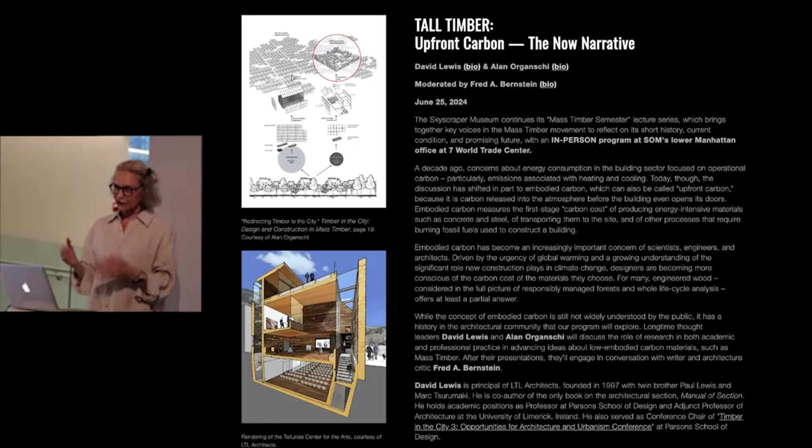I am promoting for the end of this month as well the panel talk or program by Alan Organschi and David Lewis, the title of which is Upfront Carbon, about embodied carbon. We call it the now narrative, because this very important idea of the carbon that is sequestered or not expended or escaped into the atmosphere is really a key issue in the value and carbon mitigation problems for climate change that compel us to think of mass timber as a solution. So as thought leaders and terrific architects who are showing us the way, I introduce Susan Jones.